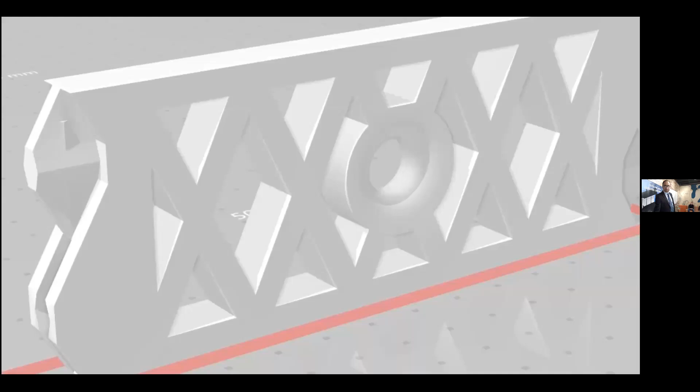I've been working on 3D printing for a decade now, ever since I was a PhD student in 2012. I distinctly remember just how revolutionary I found 3D printing to be. The idea is pretty straightforward: you have a computer-aided design model, you feed it into your machine, and it prints it out.

It has a lot of advantages compared to more traditional subtractive manufacturing paradigms. But ever since I started working on it in 2012, up to this day, there's always been this problem of quality control with 3D printing. This problem exists across a whole host of different additive manufacturing paradigms.

The first 3D printing process I worked with where this problem existed was stereolithography, using the Ultra machine manufactured by EnvisionTEC, which has been acquired by Desktop Metal recently. This is a really cool manufacturing technology. The idea is you have a bucket of liquid resin inside the machine. You input your CAD model or STL file into the machine, and an intense light source shines down on that bucket of liquid resin to solidify your product layer by layer, building it up additively. Going back to 2012, this seemed like complete science fiction, but it actually works out very nicely.

It has a lot of advantages, in that you could potentially save materials and build really cool products in a very straightforward way. But a big disadvantage is that you have this rapid heating and cooling cycle going on inside the machine, and that introduces some shape shrinkage or warpage.

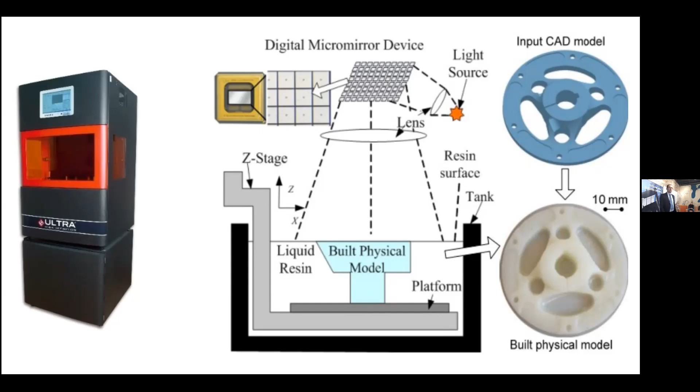So you may want the boundary of your product to be as circular as possible, but when you take it out of the machine, you'll see that it's actually kind of shrunken and doesn't meet specs. That's a big problem. In stereolithography, that problem exists.

That problem also exists for other laser-based additive manufacturing machines. I've had the opportunity to analyze data from the EOS M290 machine and the Renishaw AM400. For these machines, the idea is again you feed in your CAD model for the product, and you have a bed of metal powder inside the machine. An intense laser shines down on that bed of metal powder and solidifies it to build up your product, again additively.

This is great for critical applications. Think about aerospace and national defense, where you no longer have to create 30 distinct products that you then put together to build a jet engine, but maybe you print out 4 products in this machine that are very organic. They enable you to use less fuel, and they're just better in terms of other properties as well.

But you still have the same kind of quality control issue, because again you have this rapid heating and cooling going on inside the machine, and that introduces shape deviations and distortions. That could be critical for end-use applications. If you're flying in an airplane that has additively manufactured products inside the jet engine, you want to be sure they meet spec. Otherwise, that could increase the probability of critical failure, which could be disastrous.

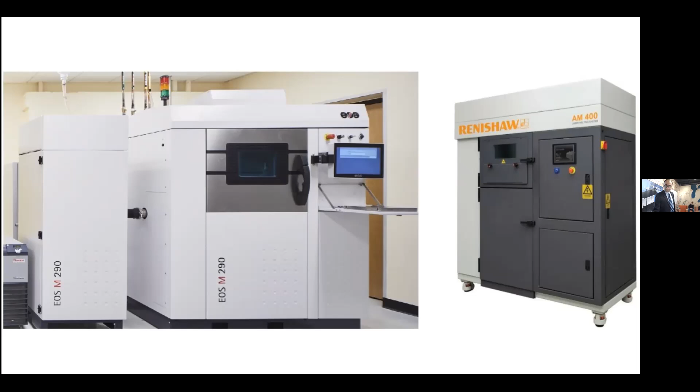Most recently, we worked with the Metal X printer from Markforged. This is also a very nice additive manufacturing technology in which you extrude metal powder that's encapsulated in a polymer type of material to build up your product additively, then you wash away the polymer, put it in an oven, sinter it, and get your final printed product.

We have here 10 products that were manufactured using the cheapest type of stainless steel for the Markforged Metal X. Again, this is a very cool additive manufacturing technology with a lot of advantages. But it still has the disadvantage that when you take it out of the oven and look at it, the dimensions don't meet spec—it doesn't have the right type of quality.

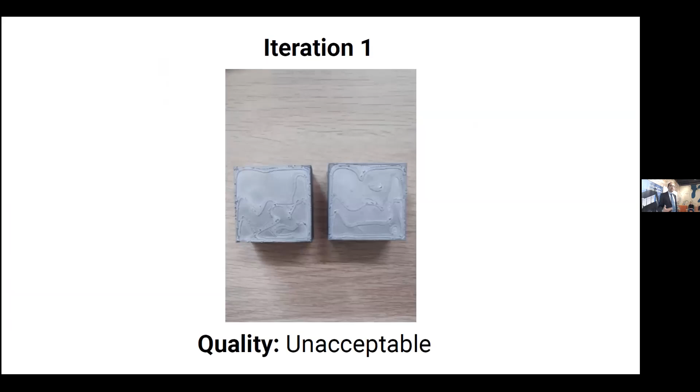Now, how did people deal with this quality control issue in the past? What they typically did, using their existing software, was go through a lot of design iterations until they finally identified how best to print out a product—either how to change the CAD model or the STL file, or how to change the hardware settings for the machine.

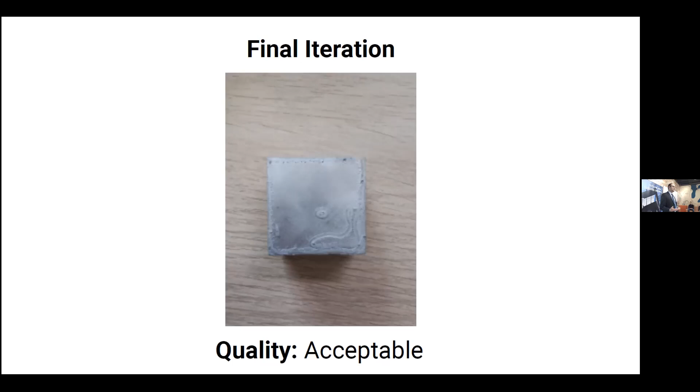It could involve as many as 10 design iterations without any learning from the past. And when you're printing out big products and not learning from the past, that could be quite painful. There do exist some software solutions to try to enable people to control quality for their 3D printing products, but they typically involve physics-based models, and those kinds of software do not offer any time savings.

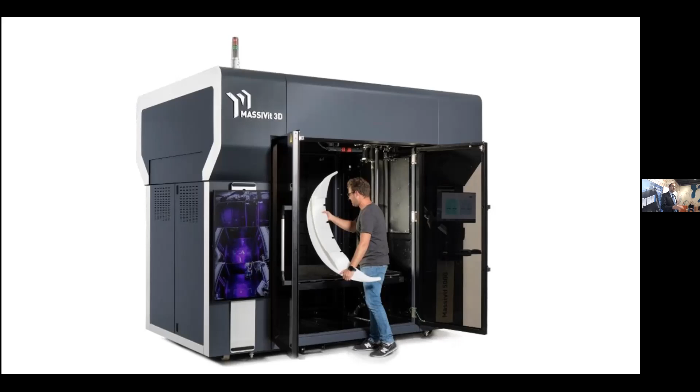In fact, the amount of time it takes to run existing software solutions based on physics-based models can be as much as it takes to actually print out a product itself. Literally, it could take you a day to print out this product, and it could also take you a day to run those models to understand how to control the quality of your 3D printed products. So ultimately, I could tell you from my own experience printing these products how frustrating and painful it is to go through a lot of design iterations, waste a lot of material, and spend a lot of money until you get something that meets spec.

This product right here, for example, let me bring this to the camera for everyone to see. This product easily costs $100. And if you have to go through 10 design iterations just to understand how best to print out that product, that's just a shame. That's a waste of materials, a waste of money, and a waste of time.

Currently, these losses in terms of the need to perform a lot of design iterations to control quality add up to nearly $2 billion globally. And that number is only going to increase as more and more people use 3D printing and as it becomes more commonplace.

So there is fundamentally a need for software to enable people to learn from the past so they don't have to do a lot of design iterations, for this software to run in a very rapid manner so you don't have to spend a day waiting for the output—you could get it in seconds—and for you to reduce the number of reprints and get quality in one or at most two design iterations.

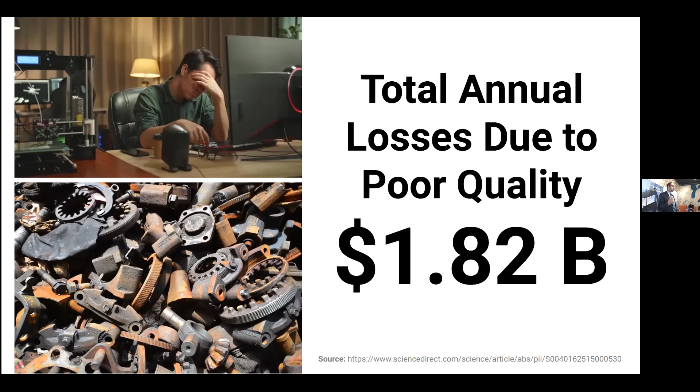And that's why we created our software solution, Amappy. Amappy enables closed-loop smart control in additive manufacturing based on our patented machine learning algorithms. It runs in seconds, and it could literally reduce the number of reprints by 70%, as I mentioned before, tripling throughput by leveraging the rich amount of information that exists in your previously manufactured products—even scrap products, even those that people typically just threw away and thought were completely useless.

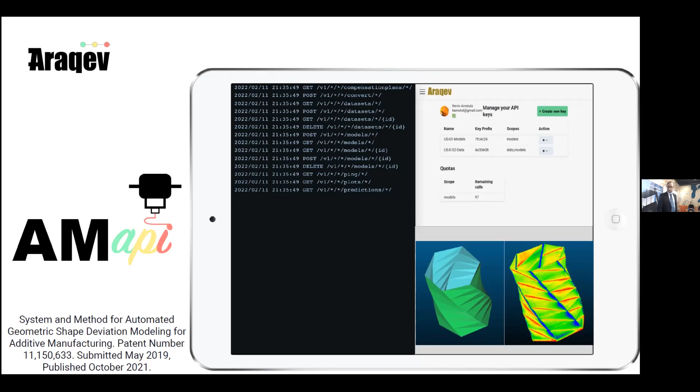So how does AMapi work? The basic idea is from your printed products, you scan them to get a point cloud of data that you then feed into the machine learning algorithm. I'm not going to go into a lot of details about the machine learning algorithm yet. If you have questions, please feel free to ask.

All I'm going to say here is that we use neural network algorithms whose inputs are the scanned point cloud data as well as your nominal STL file. From the machine learning algorithms, we can then understand how to change the STL file in order to improve the manufacturing process. The idea being that we can compensate the STL file so that in the future, when you print out a product, it more accurately meets the specifications you want.

Furthermore, we're leveraging next generation machine learning algorithms, what's called transfer learning. So we could transfer models from previous shapes, previous 3D printers, even previous materials, so that you don't have to start from scratch for every new type of shape, material, or process you may be working with. And that's really what gives our software solution a distinctive advantage over existing software solutions.

Due to our use of transfer learning, we can easily adapt to different types of materials. For example, we are able to apply our algorithms to transfer models from Ti-64, a titanium alloy, to another stainless steel alloy, 316L stainless steel, for an EOS M290 machine. So we can easily adapt to different types of materials. We're also agnostic to the type of printer you may be considering—we're not just developing solutions for an EOS, Renishaw, or Markforged.

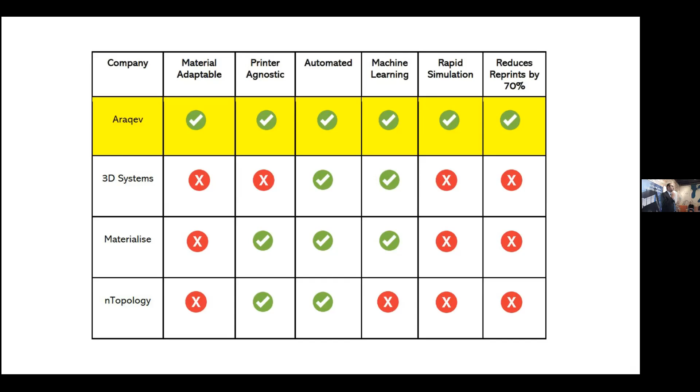We are developing a software solution that can be run on any type of 3D printer you may be working with, and it's fully automated. We're using very computationally efficient neural network algorithms that run automatically and enable you to transfer knowledge across all the different things you've printed in the past to get high quality products. At the end of the day, we could reduce reprints by 70% and triple throughput.

We validated our software in over a dozen different types of case studies. I mentioned before that we worked with the stereolithography machine. We've also worked with laser-based additive manufacturing, EOS M290, Renishaw M400. I'm going to give you a little bit of detail about how our software works for the powder extrusion machine, the Markforged Metal X, right now.

Before I get to that, I just want to say that in our most recent case study for that Metal X printer, we were able to show that we could reduce shape inaccuracies by 30 to 60%, depending on the complexity of the geometry at hand.

So let's talk about that specific case study. There are two types of shapes we're considering: one is a very smooth, organic shape, these domes at the top, and the other is a more complex shape with straight edges and sharp corners, these rectangular prisms at the bottom. The idea is that we want to show that in 1 or 2 design iterations, we could control the accuracy of the 3D printed products.

So what we're going to do is first start with those simple shapes, the dome shape, and do 1 iteration to show just how much we reduce inaccuracy. I'm going to show in a couple slides that we reduce it by 60% by means of our algorithms. Then we're going to show how we could transfer the knowledge from the dome to the rectangular prism, so as to leverage all the information from all your previously manufactured shapes, so you don't have to start from scratch with a rectangular prism, and reduce the number of reprints for that shape as well.

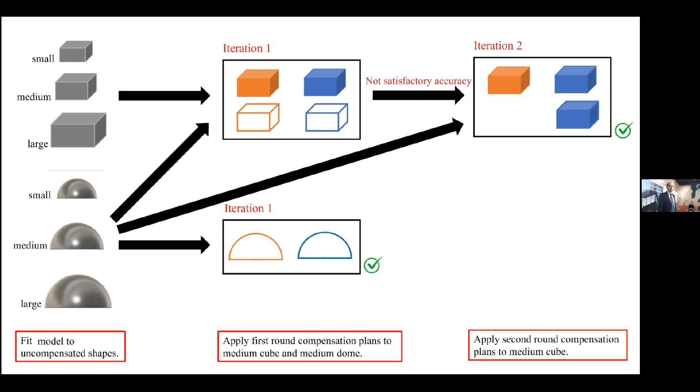To make things more interesting, we purposely printed products so that in the first design iteration, something changed and you wouldn't achieve the expected accuracy because of some lurking change in the hardware. So it required 2 design iterations. And what we show is that we could recover from a failed build. You could leverage that information from what you would previously consider a scrap product, put it into the machine learning algorithm, and still identify how best to print out products and converge to a good solution at the end of the day.

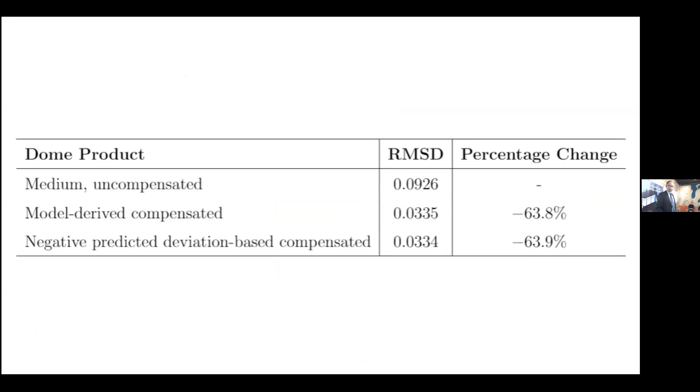But that's okay, because we could take these failed builds from iteration 1 and feed them back into our machine learning algorithm to make it a closed loop system. Then in iteration 2, we actually do recover from those failed builds, from those scrap products which people typically threw away. We leverage that information and show that we can improve the shape accuracy for the printed products, improving it by 30%, leveraging our transfer learning algorithms.

So we've been just pleasantly surprised as to how consistently our algorithms can improve shape accuracy across a whole host of different types of printers and materials, and this is just one case study that I showed you.

We've spoken to a lot of companies about direct partnerships and about applying our algorithms for their systems. Among these companies, we're under NDA with four of them, and we're currently actively working with those companies to demonstrate the utility of our algorithms for their systems. Two of them have already given us data from their 3D printing processes, and we're working with them on that.